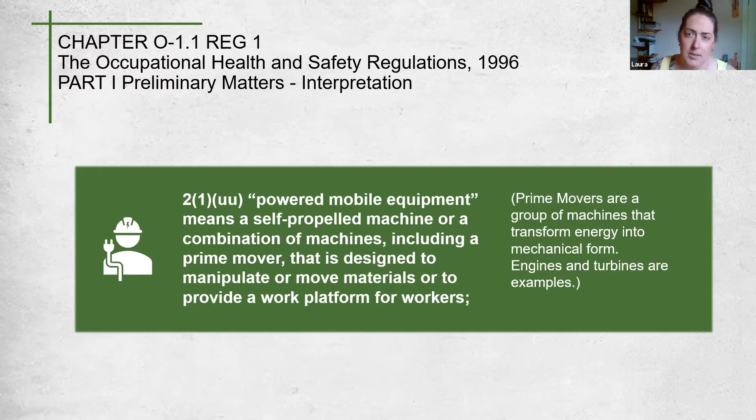So we have some common examples of PME that you might see on a construction site. The first one here is a backhoe or a loader. These are very versatile pieces of equipment. They can be used for everything from small demolition projects to light transportation of materials. They can dig, excavate, landscape, break asphalt. They're really, really good. The other one we have there is a grader.

In Saskatchewan, we're pretty familiar with these guys. Their purpose is to finish grade, so to refine it, to set it precisely. They're commonly used in construction and on the maintenance of dirt and gravel roads. They create a flat surface where asphalt is generally going to be placed afterwards.

Another piece that's really common is an excavator. These come in every size, down to sort of a walk-behind version of them and all the way up to huge excavators that work in mines. So they're primarily used for landscaping and digging large holes and trenches. They lift and place large objects as well, and they're really good for demolishing structures.

And then the last one we have there is another really common piece. A lot of you will be familiar with it. It's a skid steer. They are more commonly known by a brand name, a Bobcat. But the skid steer is a versatile piece of equipment. It's used primarily for digging, moving dirt and stuff like that. It's very light, it's maneuverable. Its arms can attach to a range of tools, so you can put forks, you can put brushes on them, pretty much anything you could think of. And generally they either have 4 wheels like the one pictured here, or they can be on tracks like the excavator is.

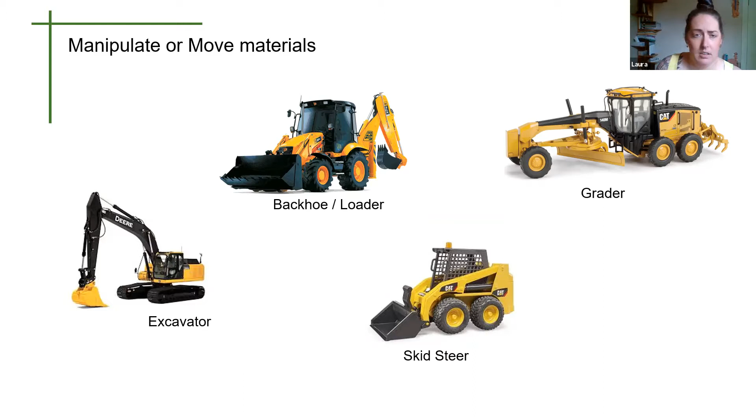So a few more different pieces of equipment that you might see on a construction site. This is a dozer or a bulldozer. It's a powerful machine, used for pushing earth, rocks. It's used for road building, farming, construction, as well as wrecking. It consists of a heavy broad steel blade or plate mounted on the front of the tractor.

The next one there is a forklift. We quite often see these in finished areas, where they're driving around on concrete. You don't often see them on uneven dirt and stuff like that, but they're very common. It's used to lift and move materials over short distances.

And then the last one I want to point out here is a lawnmower. We all know what this one does, but the important aspect here is to note the definitions we discussed in those previous slides. So what makes a piece of powered mobile equipment? Does it transport a person? In this case, that lawnmower does.

It has a seat, it has a seat belt. It's meant to have a person riding on it. It's self-propelled, so you start it up, hit drive, and it goes, and it's designed to manipulate materials. So those three pieces of information mean that this mower would qualify as powered mobile equipment. Some may not, but it's important to keep those definitions in mind, so you know what falls into that category and what might need specialized training to use.

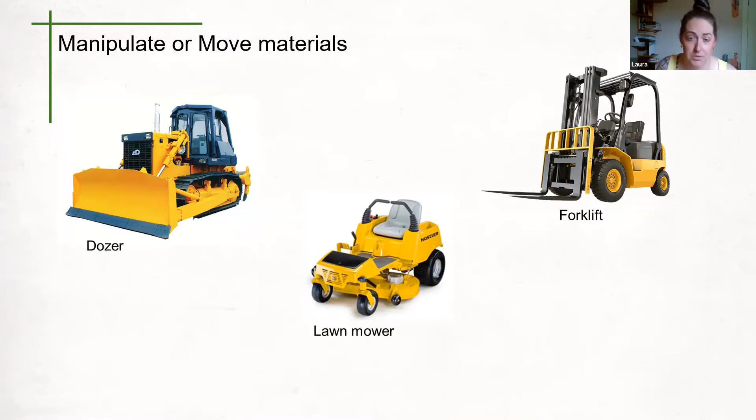So some other examples of PME: scissor lifts. This is a really common one as well. It's a motorized vehicle with a railed platform that just goes straight up and down. Some of them you can move manually. They do come in quite small sizes - you can see them inside malls, usually used for setting up Christmas decorations and stuff - but they also get quite large, to reach higher areas and have more than one guy on top of them.

Another example of PME is what's called a cherry picker. This is basically a vehicle-mounted boom lift or boom truck - a man lift on top, usually attached to a vehicle of some sort, used for raising and lowering workers. Again, that's PME - if it's used as a working platform and has its own self-propelled engine, it's PME.

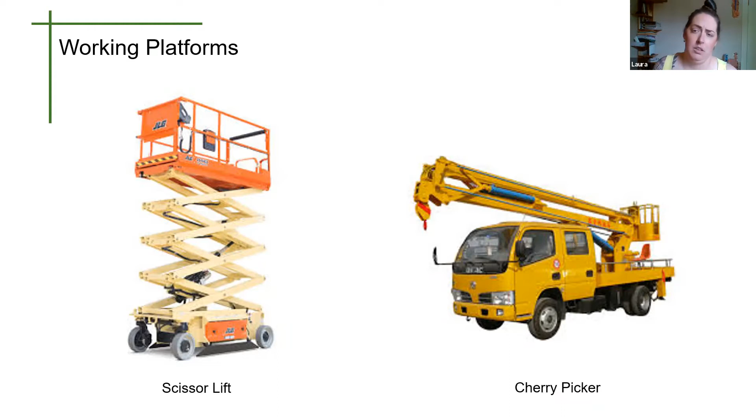And then we have some other common working platforms you see on sites. The first one is the telescopic boom lift. These are used when crews need to access areas blocked by rough terrain, or somewhere the lift can't get itself into. The boom extends quickly and straight out - as you can see, it only goes in one direction. The lift can be driven in some positions with the boom fully extended, but that's very particular to the manufacturer and equipment you're using, what it can and can't do while extended or not.

The other one we have here is an articulating boom lift, very similar to the telescopic, just that it has a few extra elbows, so it can reach into even more difficult areas because it can articulate, allowing the operator to gain access over obstacles or barriers, as well as having the base set far back.

And then another example is a spider lift. This is again the same thing, but a smaller version. These are extremely maneuverable man lifts, usually used for very tight spaces. As you can probably see, these outriggers fold up so you can put it onto a flatbed or something like that to transport it around.

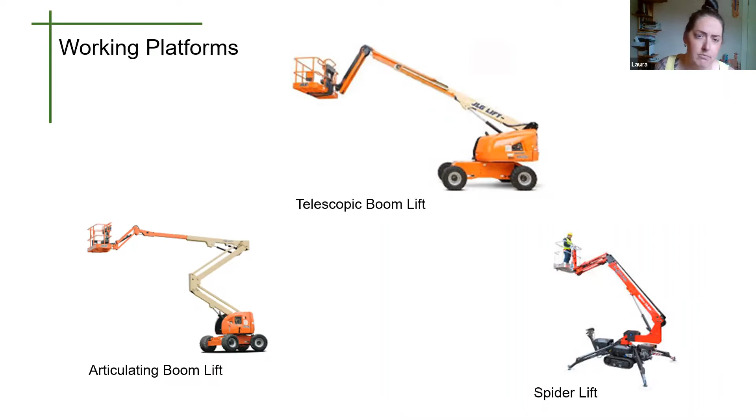Okay, so now that we're pretty clear on what exactly PME is according to the law, let's talk about who is authorized to use them in Saskatchewan.

So, trained operators of PME. With this definition, when it comes to who is allowed to operate the PME, the legislation is very clear - only trained operators are required or permitted to operate powered mobile equipment. So you have to be a trained operator. But what is a trained operator? Well, there's a definition for that too. Someone who is a trained operator has successfully completed the training program included in the elements set out in Table 14.1 - we'll talk about what's in there later.

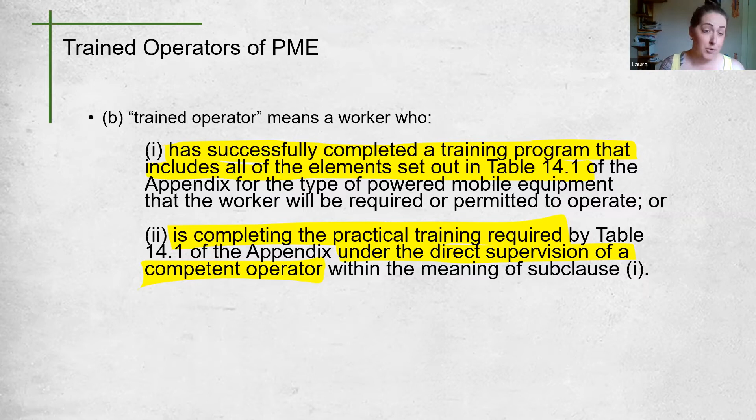As well as completing that training, they complete the practical training required by Table 14.1, under the direct supervision of a competent operator. Touching on a competent operator versus a trained operator: a trained operator has gone through the training but is still working on practical experience. A competent operator has all that practical experience and has been deemed competent. Once you've completed both the theory and practical portions - we'll go into detail about what's required a little bit later - but you need both.

That individual may be deemed a competent operator, which means they can operate that equipment without supervision.

So we'll jump into the training piece on PME now. We're going to talk about table 14.1, which we mentioned before. This table tells you everything you need to know about PME, how you need to train your guys, how often you need to train them, what's allowed, what's not allowed, and even previous training that may be accepted.

Table 14.1, shown on the left there, discusses what must be included in the training program. If a company is not sure their training meets the requirement, all they have to do is look at this table. It's basically a checklist to ensure you've covered all the information someone needs to know before they operate PME.

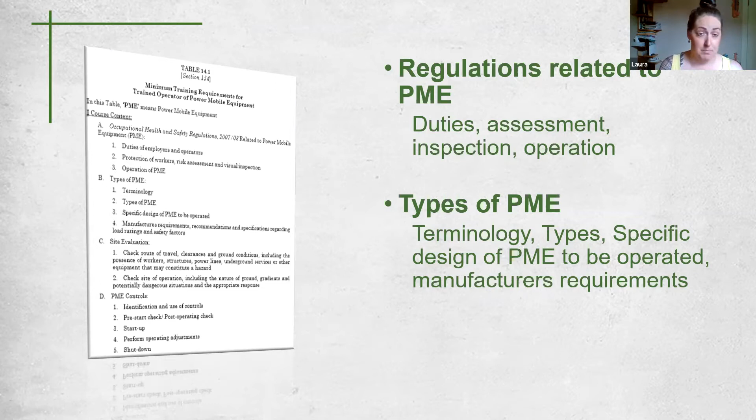The regulations related to PME include anything specific to that type, as well as duties, assessment and inspection, and actual operation. You also need to cover the types of powered mobile equipment, things like terminology, types, and specific designs to be operated, as well as manufacturer's requirements. You're not just giving them a general skid steer or excavator course—you're teaching them on that particular piece of equipment and everything there is to know about it.

You also need to talk about site evaluations with the workers. They need to be trained on proper clearances around PME, how to identify and rectify ground conditions appropriate for different types of PME, as well as keeping clear of workers and structures. You need to cover controls too—your pre and post check, operating adjustments, and your startup and shutdown of that equipment.

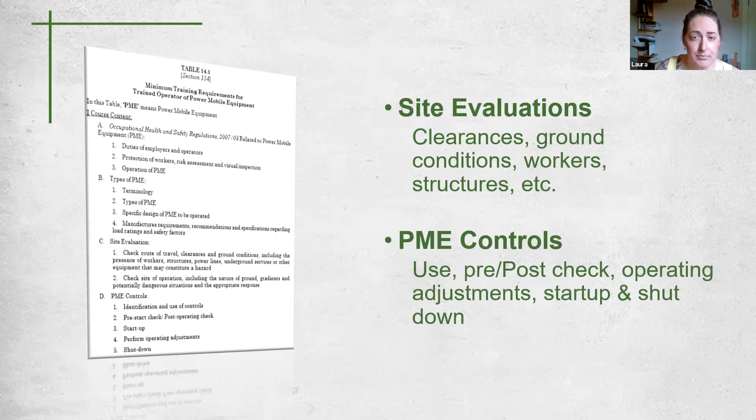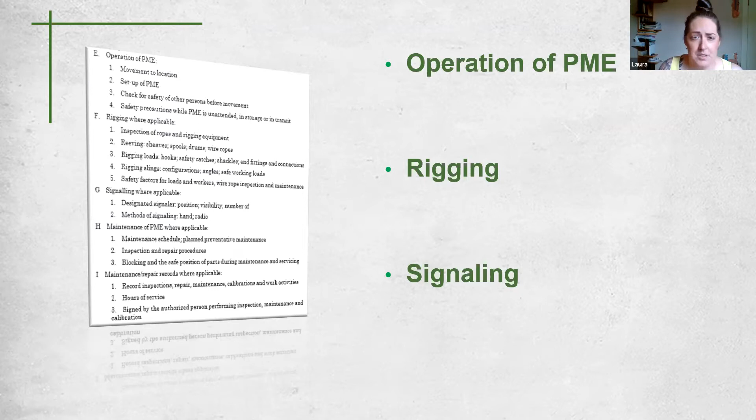Classroom training should include the operation of PME—things like movement, setup, safety, and precautions. If applicable, workers should be trained on rigging: use, care, inspection, and maintenance of the rigging equipment. Where signalers are required, training should cover their position, visibility, and hand and radio signals depending on what you're using on site. Those two may not apply to you, but if they do, you have to train your guys on how to use them.

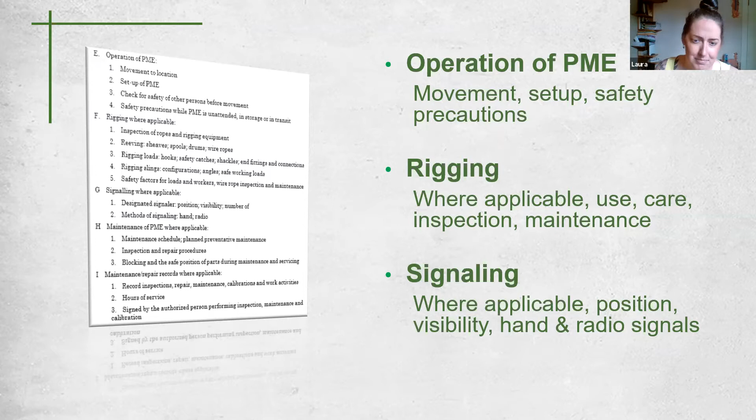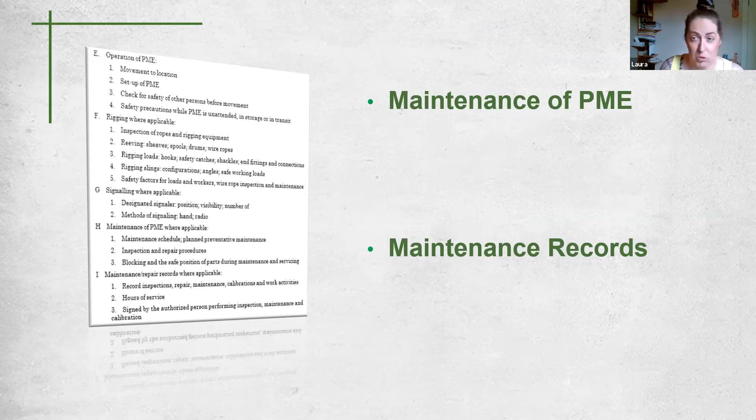Table 14.1 also goes into the maintenance of powered mobile equipment. The last few items on the table only apply to the operator if they will be doing maintenance on that equipment—if not, this doesn't apply. But if they are, we talk about the schedule of preventative maintenance, so how often the manufacturer wants certain maintenance done, whether it's oil changes or fluid changes.

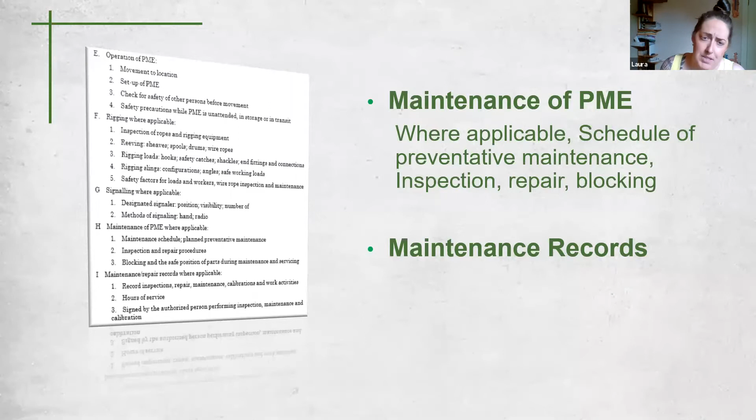How often inspections should be done—generally there's a pre-use and post-use inspection every day. A lot of equipment manufacturers will require certain types of inspections or maintenance at different intervals, at 1 year, 5 years, 10 years, or hours, depending on the type of equipment. As well, maintenance records need to be kept—hours of service, authorized persons to do that maintenance. They need to be trained in all of that.

Now the bottom section of table 14.1 is a little different. This one goes into details such as the minimum number of hours somebody needs to be trained before they can operate it or be deemed a competent operator. You must have a minimum of 16 hours of training, both theory and practical.

The legislation doesn't say you must have 8 and 8, or 4 and whatever, but you have to have a total of 16 hours. It's pretty easy to get, because if you send your guys in for a half day or a 1-day course on PME for the theory portion, you're only maybe getting them out in the field for 8 hours, depending on how many hours your course was. So 16 hours is not a lot of training, considering the types of equipment they'd be deemed competent to operate after that. But you must have 16 hours and it must be documented.

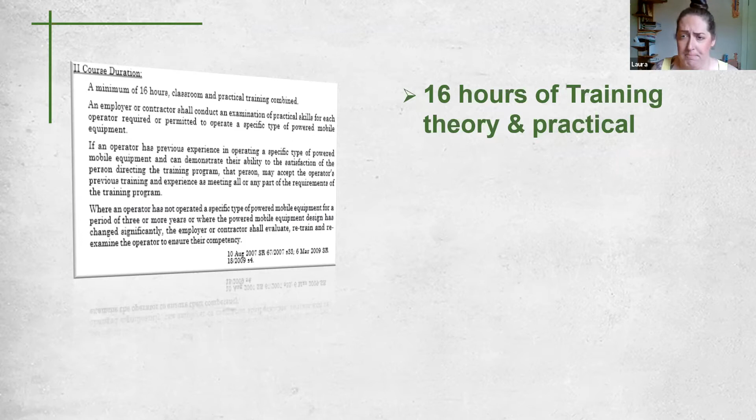You must also have basically one examination, one operator, and one specific type of equipment. This comes up a lot because quite often we see people who have maybe been deemed competent on a skid steer, but they weren't actually deemed competent on a Bobcat skid steer or a Case skid steer. They were using a Genie or whatever. The legislation does specify that you have to train them individually on those types of equipment because they vary greatly, and we're going to go into the details on that here shortly.

The other thing this table goes into is what previous training might be accepted. If an operator has previous experience operating a specific type of powered mobile equipment, and they can demonstrate their ability to the satisfaction of the person training them, that person may accept the operator's previous training and experience as meeting all or any part of the requirements of this program.

With that being said, it's pretty common, like in Saskatchewan, we have farmers who've grown up using equipment their whole life and have never once gone to a course on it, and that's fine. To meet the requirement you still need the 16 hours, but this section of the table allows you to say, okay, if they have previous experience, and as long as you get them that theory portion of the training, then that experience they have—as long as they can demonstrate they can use the equipment, that they can operate it smoothly, do their startup and shutdown—they may not necessarily need to do the full 16 hours, but they still have to have a theory portion. So they still have to have that classroom training, but your previous experience may count.

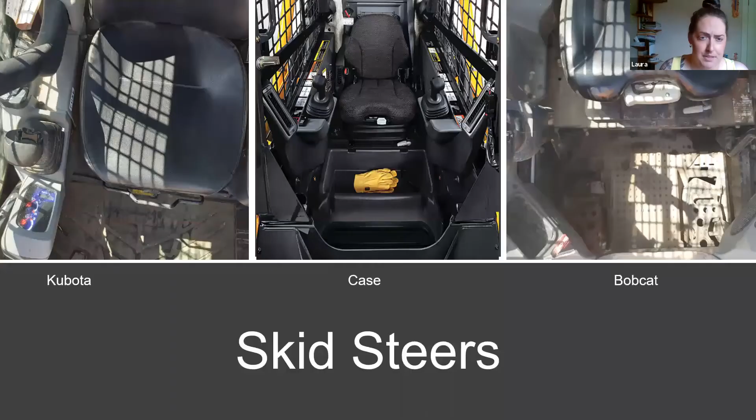So the first round of pictures I have here are some skid steers. The first one on the left is a Kubota skid steer, the middle one is a Case skid steer, and the one on the far right is a Bobcat. Now they look pretty similar if you don't really know what you're looking for, but they are very different in how they operate. The Bobcat, for instance, on the far right—what we're looking down at is the seat and some foot pedals—actually operates its bucket with foot pedals. Now the Case and the Kubota skid steers: in the case of the Kubota on the left-hand side of the picture, you'll see a joystick. In the Case model, you can see there's two joysticks on either side of the seat, and those joysticks control both the forward and backward motion of the equipment, but also the bucket.

So again, one brand to another, they can vary greatly. You do need to have some time and experience operating each piece to make sure you're comfortable using those different controls, because it's a lot different going from two hands and two feet to control it, versus just using your two hands for those same things, or vice versa.

So the second round of pictures here I have are control panels on boom lifts. This would be either on a telescopic boom lift or articulating boom lift, like we had shown in those pictures. But as you can see, there are three different panels here.

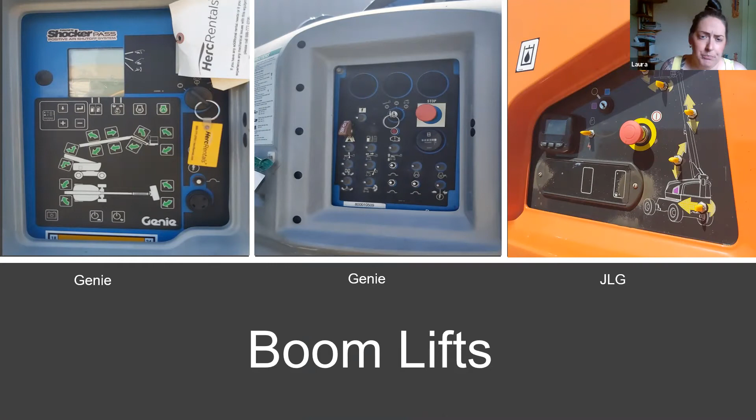And then the last round of pictures here are from scissor lifts. So again, these are those large platforms with scissor-like mechanisms underneath. It just goes straight up and down. On the left there, we have a Skyjack. It's got some toggle switches and some gauges and your emergency stop. It's mounted on the outside of the box, and it's the drive function.

The one in the middle is the JLG, so these controls, again, are the same controls as far as driving the machine back and forth and having the emergency stop. But as you can see, there's only one toggle switch and a couple of buttons on here. So it varies greatly from your Skyjacks to your JLGs to, on the right-hand side, your Genie controls. Again, your Genie is on the outside, like the Skyjack is, but it's a very different control. You're going to need to learn how to use it and be comfortable with that unit before you get into it.

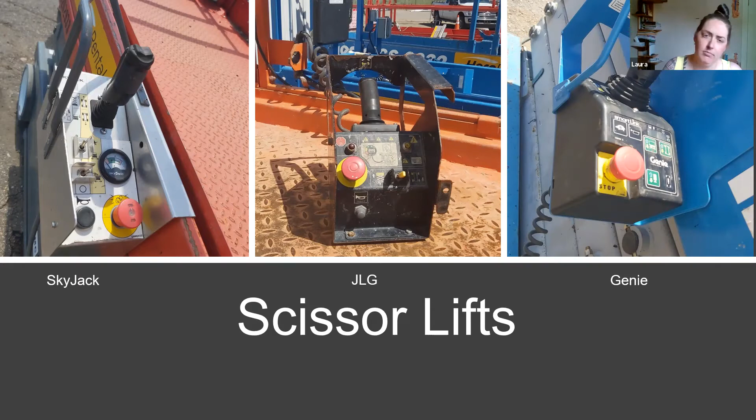So just some key points to cover with comparisons of this PME. Workers need to be deemed competent on each piece of equipment. Your best case scenario is to document those hours, make sure that there's a supervisor close by watching them while they're doing those hours, and keep it on that person's file, that they're capable of operating your genie lift or your specific JLG or your Case skid steer, whatever the case may be. Specific types of equipment to each worker.

Document all your training. Equipment specifications can vary greatly even with the same manufacturer. So keep in mind those two genie lifts that we had side by side and the control panels look nothing alike, and that was the exact same manufacturer. So just operating one kind of equipment doesn't make you competent for all types of equipment. And it's on the employer to ensure that the people they have operating this equipment are deemed competent and that they have sufficient supervision on hand.

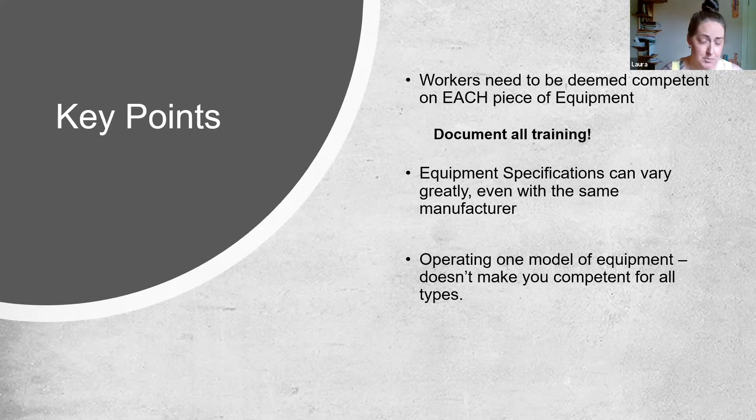So we will jump into the maintenance of powered mobile equipment. The legislation is very specific about maintenance, who can do it, what types of maintenance, and when maintenance needs to be completed on certain types of PME.

So when it comes to the maintenance and repair of equipment, the legislation is a little bit vague, but this is actually intentional. An employer shall ensure that all equipment is maintained at intervals that are sufficient to ensure the safe functioning of the equipment. So again, it's very vague. We have to maintain it, make sure it's safe. And really the only way to do that is to read your manual. What does your manufacturer say you need to do? They're the experts in it. They designed and built this equipment, so they're going to tell you what needs to be done to make sure that it's in its prime operating condition at all times.

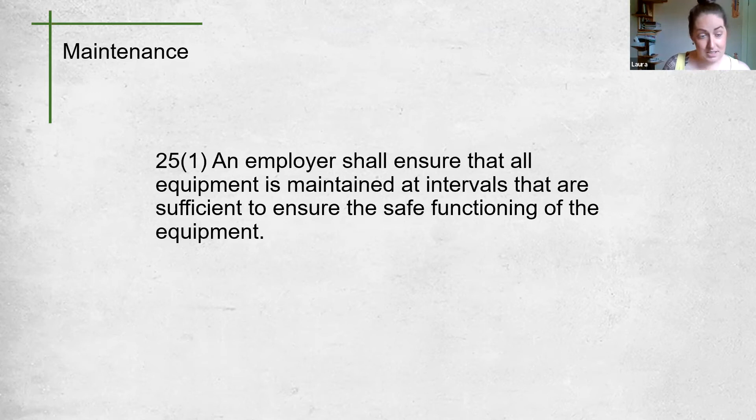So the next slide and my next question is, where would an employer find the information that they need to make sure that the equipment's functioning safely?

In the user manual. This is something that I find in my experience as an advisor, as well as working on job sites. Oftentimes companies and workers, they have a skid steer or whatever, and the last thing they look at is the manual. And we just can't stress enough how important this is. The manual is where you're going to find everything on developing your preventative maintenance program for sure, what the manufacturers say has to be done on this piece of equipment.

They are the experts. Again, if you're working towards COR, this is a big area that a lot of companies, I wouldn't say struggle with, but it's an area where stuff can get missed easily. So if you need some help developing the program, that's what the advisors are here for.

But the best thing you can do with any piece of equipment, if you're going to be doing any maintenance on it at all, is keeping the manual on hand and following it to a T. Because when we come out to do an audit, that's what we're looking at. Okay, you have a Genie Lift 4000. Where's the manual? What does the manual say you should be doing? And what are you actually doing? So don't throw them away. Read them, know them, follow them.

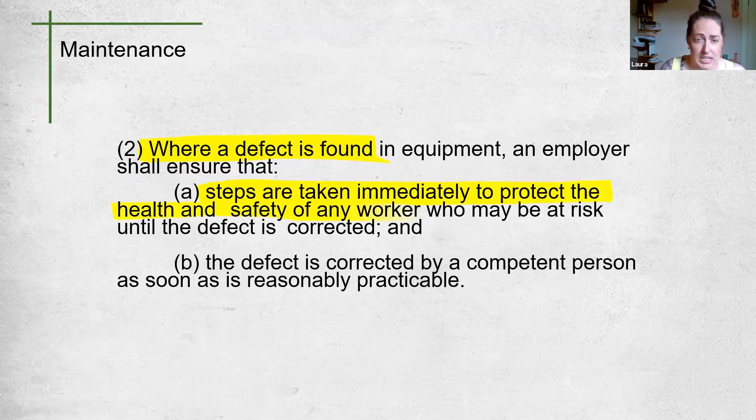So maintenance goes on. When it comes to repairing equipment that is broken down or has a failed part, the legislation is very clear in this area. Where a defect is found in any piece of equipment, steps must be immediately taken to protect the health and safety of any worker who may be at risk, and the defect must be corrected by a competent person as soon as reasonably practicable. We talked about that earlier - they must have the knowledge, training, and experience to be able to do that maintenance. So you're not just having anybody do an oil change or flush the hydraulic fluid or whatever the case may be.

Yeah, one comment on that last one about maintenance - if you can't get something maintained right away, an effective way is to lock it out, tag it out, to protect the workers. So when you're advising companies, having an effective lockout tagout system is really important. That's a really good point, thanks for mentioning that. That's part of the COR program too. So maintaining the equipment is part of it, and having lockout tagout is another piece that's required for COR. Just having a system in place to let people know they can't operate that equipment, that it's currently out of service, is your best bet to make sure nobody inadvertently starts up something that could hurt somebody.

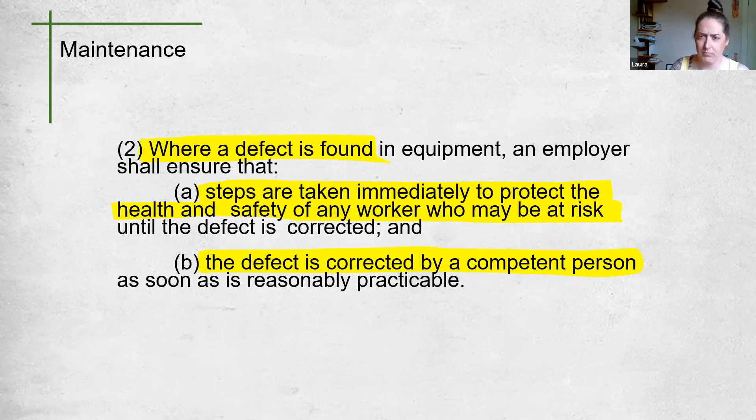So workers do have some responsibilities when it comes to maintenance, the most important of which is reporting. If a worker has reason to believe that the equipment under their control is not safe, they need to immediately report that condition to the employer. Workers can only perform maintenance if they've been authorized by the employer to do so, and that they are competent.

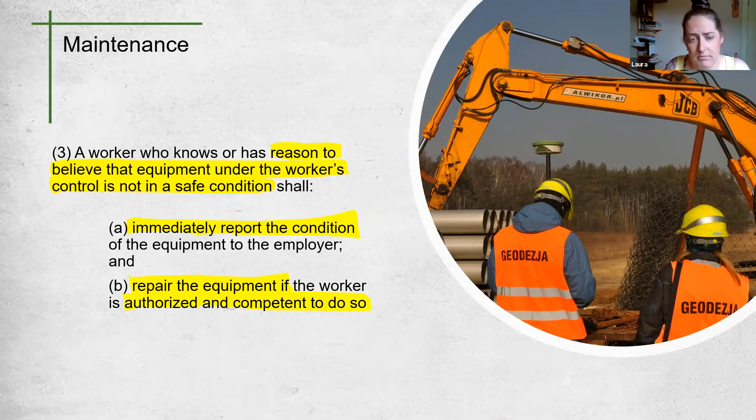So it's just some things important to note about maintenance. Being deemed competent to operate does not necessarily mean that you're competent to perform maintenance. So those are two separate things, regardless of how minor the maintenance is.

I know, it comes up a lot - 'well, I've been working on equipment my whole life,' and that's totally fine. I'm not here to doubt anybody's experience, because I'm surrounded by nothing but farmers personally. So you just have to document that experience. You just have to say, hey, I've worked on this equipment, or this is the stuff I've driven in my life. If you have letters from previous employers or anything like that, put it all together, add it all up, so we can say, hey, Jeff at this company has been operating equipment his whole life, and this is the specific types we've deemed him competent on, based on his experience working on a farm using this equipment, working at the mine using this equipment. Whatever the case is, it's not impossible.

Don't overthink it. If you're having any trouble at all deciding whether somebody is competent or how to go about becoming competent, just call us and we can help you. We've got forms and everything to do with that. So employers, you must maintain records of competency for your workers and for any in-house maintenance. If we come out to your company to do an audit and one of your guys is doing oil changes on the equipment, great - what makes you competent to do that?

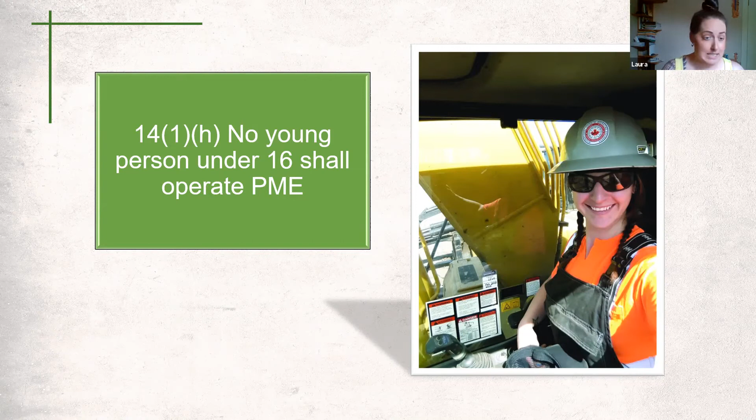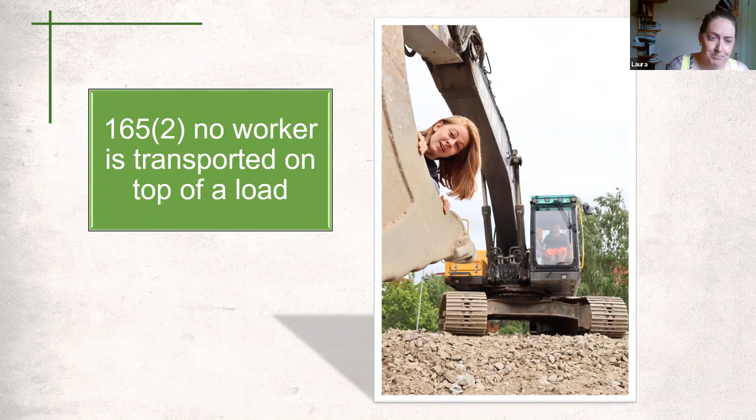Where there is an open vehicle or a unit of power mobile equipment used to transport a worker, they must be restrained from falling. So you've got to have seatbelts in there.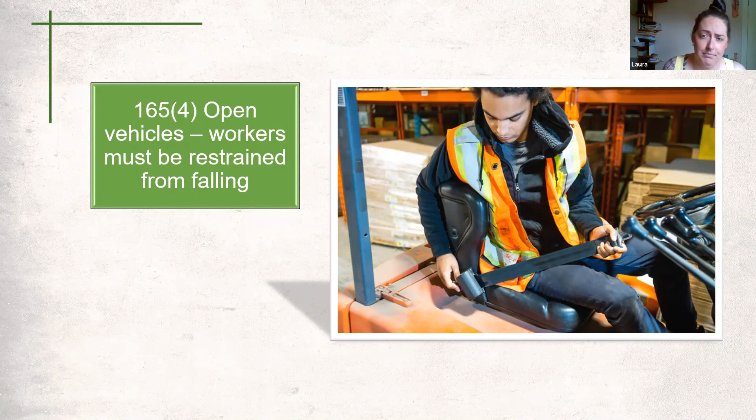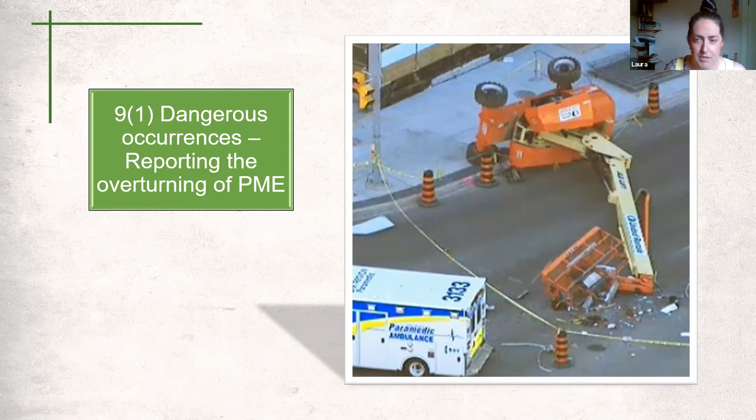Just a couple more pieces of legislation. Section 165.1: workers must be seated and secured when inside a piece of mobile equipment that requires them to be seated and secured. If, say, they're in a JLG or a scissor lift and working at heights, they have to wear fall protection - you need an anchor point, a designated anchor point inside that compartment, and be secured to it. You can't have anything inside PME compartments that isn't secured - no materials or tools floating around, especially depending on the type of equipment you're driving and where you're driving it. If you're on a big open pit construction site with uneven ground, you don't want stuff bumping around, falling out, hitting you, or knocking into a control. So make sure everything is secured, and if it's not secure, then it's not in the equipment.

The next one is you must have protection against inclement weather. So if they're working outside and it is pouring rain or anything that could essentially harm the worker, you have to have protection against it. That's generally pretty good. You're not cutting lawns in the rain or the hail, and most equipment nowadays does have enclosed cabins with air conditioning, so that's lovely.

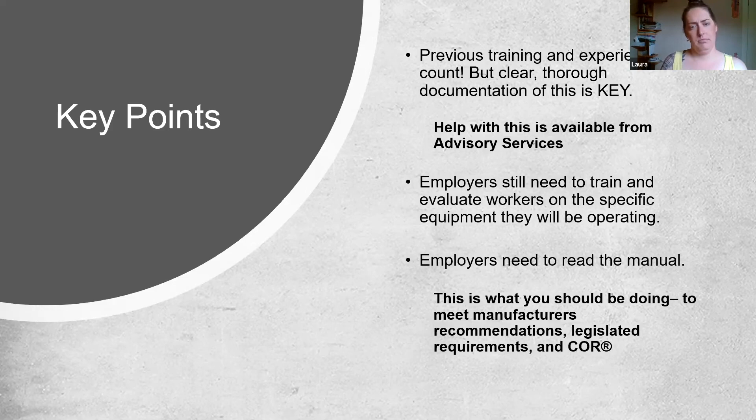So that basically sums it up for PME. Again, I can't stress enough that advisory services is here to help. If you need help with documenting the training, figuring out what you might need, if it's even worth it for you to do this, or maybe renting equipment versus buying, things like that. We can't tell you what to do as a business, but we can talk about your options and what may or may not work for you because of what you're required to do by the law, by COR if you're going for that, and by your manufacturers.

And that's basically it for me, guys.

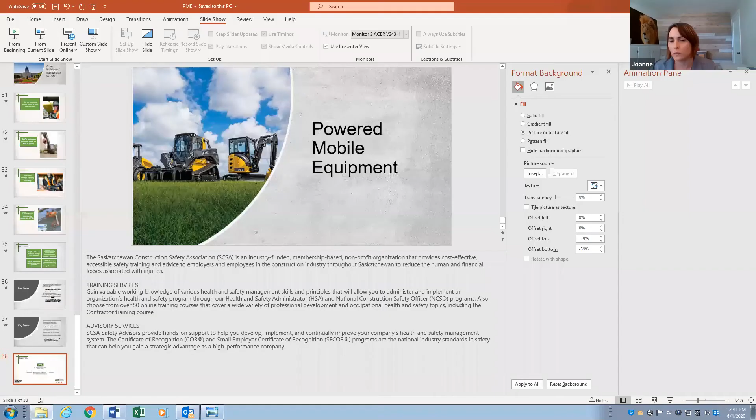Thank you so much, Laura. That was a great presentation. So much great information. We covered, there is a lot of legislation when it comes to powered mobile equipment, and you covered it very well. Thank you again. I had one question written down, you know, what's the age? And you covered that and had a couple more, so that was really great.

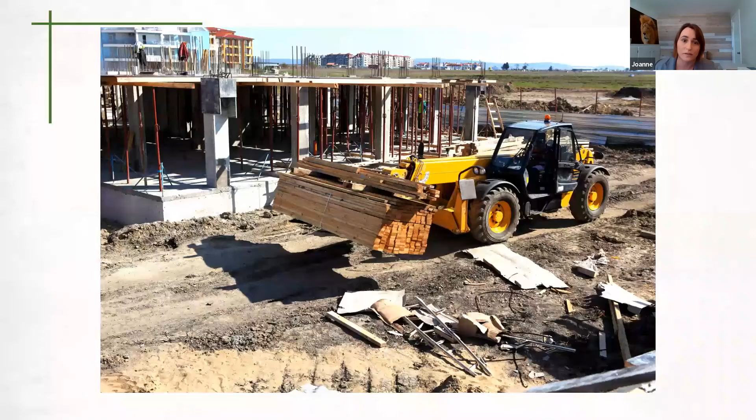Hey, thank you. I do have a couple pictures I'm going to bring up just to bring up some conversation about PME. We did cover a lot of legislation and a lot of good information, but I'm going to bring up some more site-oriented pictures with powered mobile equipment. Give me 2 seconds here to share my screen. Okay, so you should see a piece of powered mobile equipment here on site. So what are some hazards that we can see here by looking at this?

Well, you could tell obviously that you have an issue with vision for the operator. So anyone working in the area would have to take that into account, and that's one of the big points of the high vis vests around equipment - these operators are focusing on a lot of stuff. Maybe the load's shifting a little bit, they're on really bumpy ground. Also, on a side boom or a zoom boom like this, if those forks need to lift up a little bit - let's say the operator's going over a hump and needs to lift that load a little bit higher - the operator loses the whole right-hand side of the vehicle. So the blind spots on something like this are ever changing and pretty dramatic.

So I would say that there's a lot of hazards for other workers working around this. Not to mention, where is this operator driving? They could be running over pins, over stakes. They may not know where any of the hazards are in the area. So I would say using a spotter to bring a large load of wood across the yard is an extremely good idea as well.

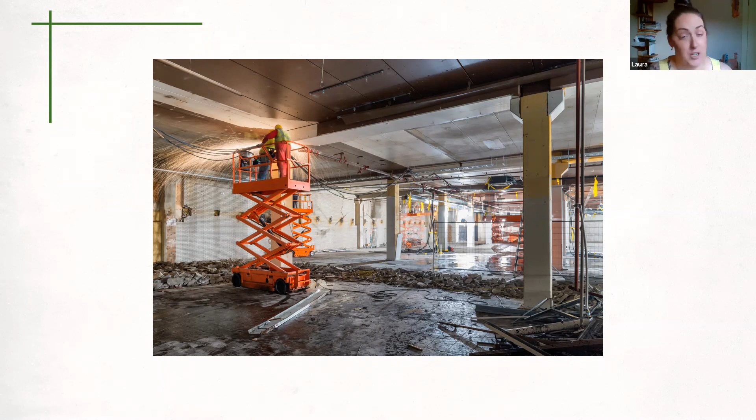It's the same thing with seat belts and rollover protection on forklifts and stuff like that. That seat belt's designed to keep you in it. Yes, if it goes over, you could be hurt, something like that. For one, though, if I'm driving a forklift and I hit something, it's like shoveling and you hit the crack in the sidewalk and it just stops you suddenly, you're going to face plant into the steering wheel or into the mast of the machine, that kind of stuff.